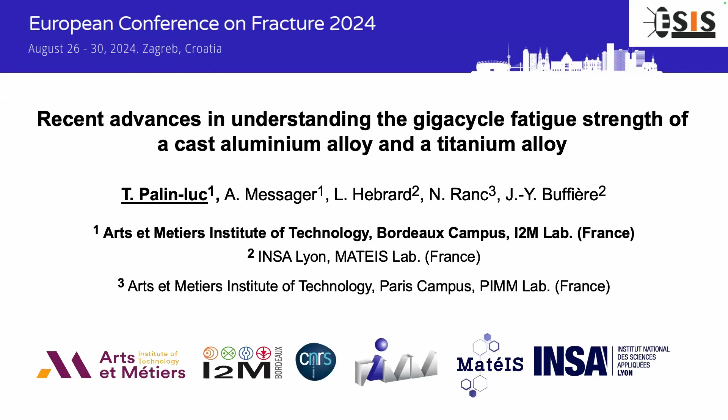As all of you probably know, according to recent research during the last 25 years, there is probably no infinite fatigue life. We have to consider, for ensuring very good reliability of structural integrity, that cracks may appear even after very, very long life.

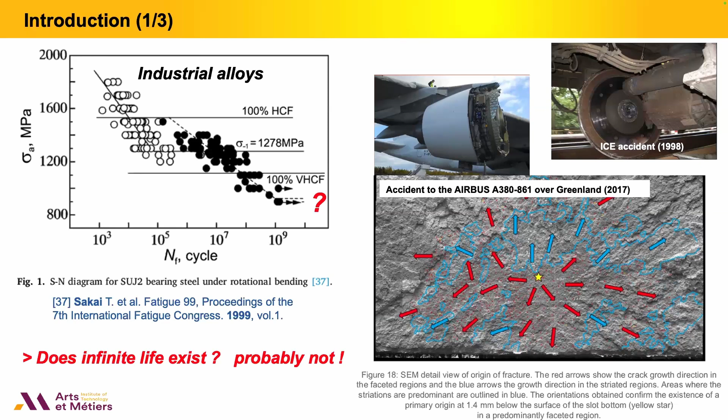Recent incidents or accidents: here are two examples. An example with a high-speed train around 30 years ago, and a more recent accident with an Airbus reactor in 2017. Responsible for these accidents or incidents were internal defects.

In very high cycle fatigue, the role of defects is very well known as a crack initiator or trigger for crack initiation. In the high cycle fatigue regime, around 1 million or 10 million loading cycles, there is a very famous Kitagawa-Takahashi diagram.

Oh, I have a problem with...

On the left you can see the Kitagawa-Takahashi diagram, which gives the effect on fatigue strength, at for instance 10 to the 7 cycles, of the square root area of the defects. Up to a critical size there is no significant effect on fatigue resistance, but when the defect is too large, it decreases drastically the fatigue resistance.

But the problem is that such a diagram doesn't explain why, when you decrease the stress level, the fatigue crack initiation shifts from the surface to the internal region. We know that critical defects are in the material and give a typical pattern like fish eyes, but we do not explain why there is this shift from the surface to the core.

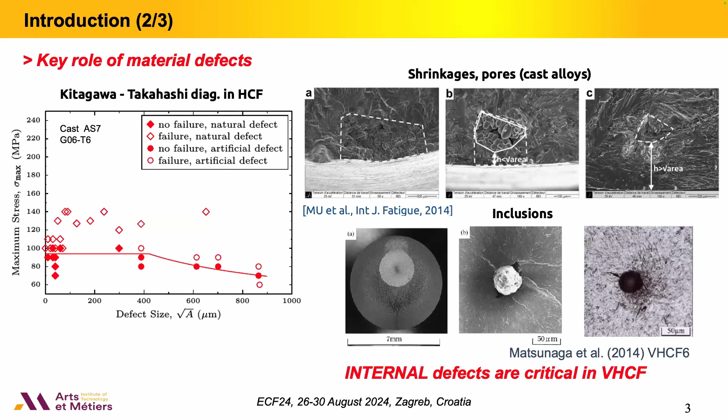The objectives of the different works we have led with the PhD students was to answer the following questions. We would like to do direct observation of internal cracks, initiation and early crack growth, in order to try to understand the mechanisms, and to compare the kinetics of the crack at the surface and in the core of the specimen.

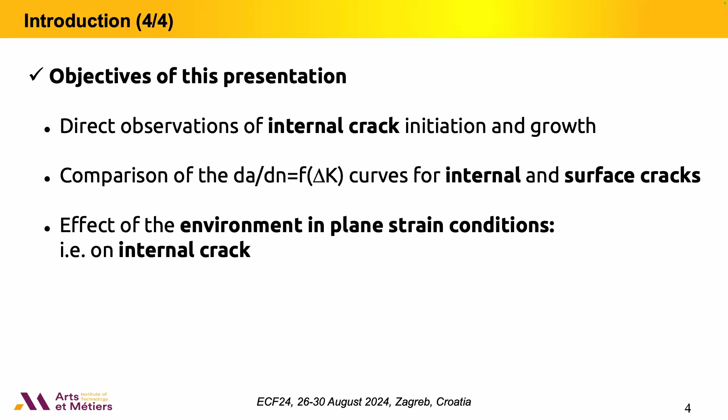The aim is, in fact, to study the effect of the environment on crack growth under plane strain conditions, because in the literature many authors explain that the criticality of internal defects and surface defects are different, because the stress and strain states are different: at the surface you are in plane stress, and in the material, plane strain.

In order to reach this goal, I have organized my presentation into three main parts. First I will present the materials and the specimens, because they are very correlated together, and I will explain why. The second part is devoted to the experimental method or methodology and the techniques we have used. The core of the presentation is devoted to the results and analysis, before some conclusions and prospects or challenges for the future.

The first material is a cast aluminum alloy with silicon and magnesium, which is very well known. This is A357 in the T6 state, a classic aluminum silicon magnesium alloy.

This alloy has been produced by the French Research Casting Center in Paris. I emphasize that this is exactly the same alloy produced also in other research published by Serrano-Munoz and co-workers approximately 8 years ago. So we were able to take the results from the literature and compare their results with surface cracks to our results on internal cracks.

Our material has a secondary dendritic arm spacing around 28 micrometers, an important parameter for the fatigue behavior. We have the typical microstructure with an alpha aluminum matrix and silicon particles.

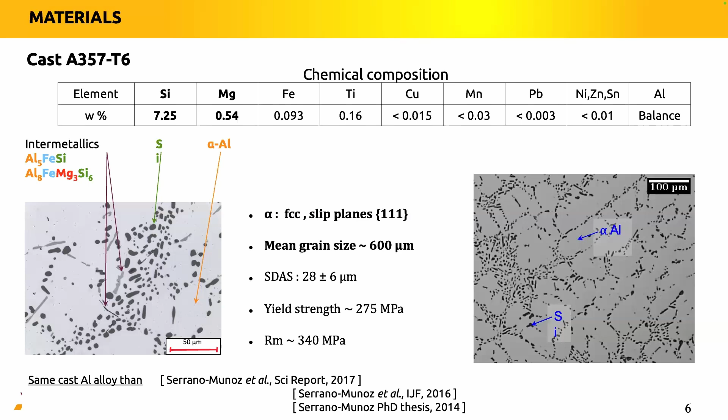These materials were cast in round bars in order to machine the specimens inside the bars. Two batches were prepared, in fact three, but today I'm presenting only two of them. The two batches of interest today are: the reference batch for the reference fatigue strength of the material with the smallest possible defects we can produce by casting, and the second batch of specimens with a single big defect in the center of the bar.

So we have created artificial internal defects with a diameter of a little less than 1 millimeter, around 700 or 800 micrometers. These big defects you can see here, on the left, show a tomography slice of a specimen with a diameter of 3 millimeters, with the internal artificial defects produced by a small piece of salt. You can see it here reconstructed after tomography in 3D.

The defect is in red, and around it are pink, very small natural defects. The idea of this central defect is to promote crack initiation, in order to be sure that where we observe the phenomena exists and not elsewhere.

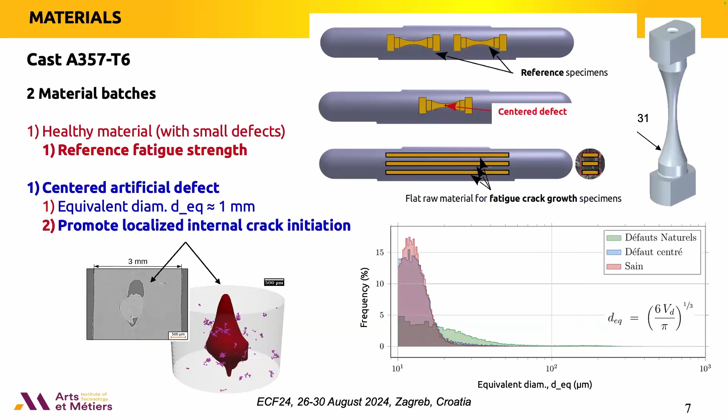We have also produced some flat specimens for classic crack growth measurement with classic fatigue testing. I will not present those results, I present only the results about the other specimens.

The other materials are specimens in a titanium alloy, the Ti64, which is very well known in literature. It has been obtained by hot rolling, and after we have applied an annealing treatment. This is a classic alpha-beta microstructure. Most of the microstructure is the alpha phase, around 94%, with a grain size much smaller compared to the other alloy, around 10 micrometers.

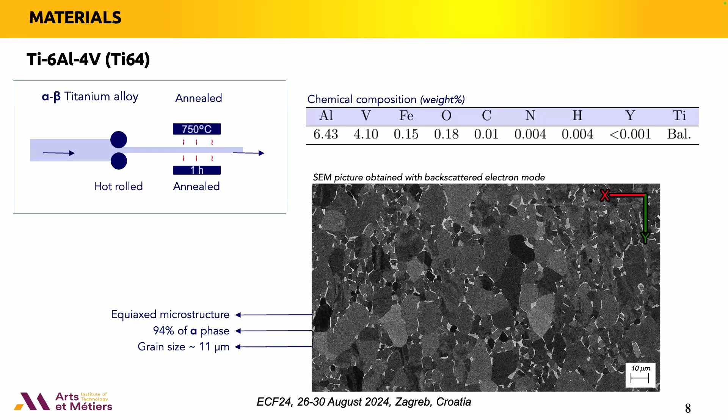In such an alloy, since it is produced by hot rolling, we are not able to introduce artificial defects easily by manufacturing. So we decided to introduce an artificial defect with a special procedure. It has been prepared and defined by Arnaud Junet, and it is published in this paper in Scripta Materialia.

The process is the following: you cut small pieces in a flat titanium sheet, and we produce at the surface of one sheet a sharp notch, a very small sharp notch, by a femtosecond laser. Then we polish very precisely the surface of 2 plates, and bond the 2 plates by spark plasma sintering. This process is made under vacuum, so it is interesting because in this case you obtain finally a piece of titanium with a very sharp notch under vacuum in the center of your specimen.

After assembling these 2 plates, the specimen is machined by turning. We have obtained precisely the position of the sharp notch by X-ray tomography before machining, so we are able to know that the defect is in the center of the specimen. Here are 3D images of the defects. Its typical dimensions are a length of around 200 micrometers, a width of 120, and an opening of 20 micrometers maximum, typically 15, sometimes 20.

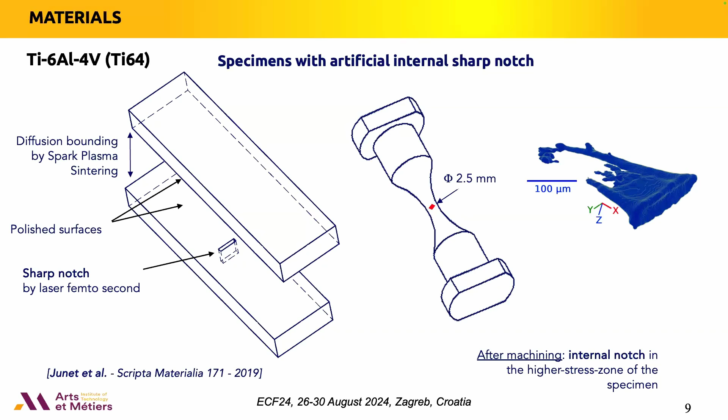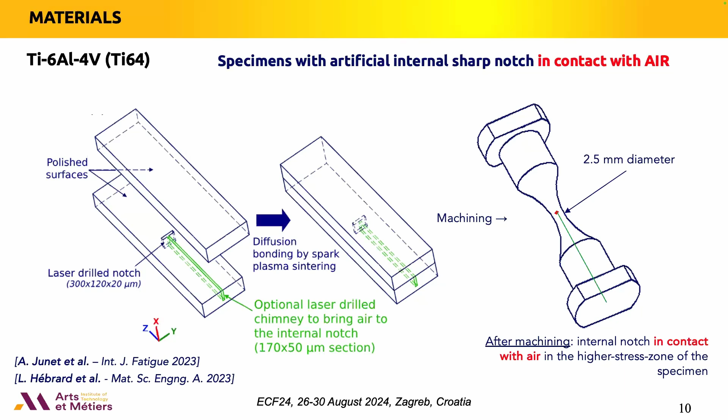The other set of specimens produced uses the same procedure, but the idea is to allow the air of the lab to come into the crack inside the specimen. So by laser machining, we produce a small canal or chimney that allows air molecules to come into the crack, into the center of the specimen. We use the same procedure, and finally we obtain the specimen with the central defect and the chimney to allow air to come into the specimen.

Now I'm presenting the experimental method and techniques. In order to observe the crack initiation, we will use in situ fatigue experiments with synchrotron. I'm also presenting the specificity of the specimen geometry.

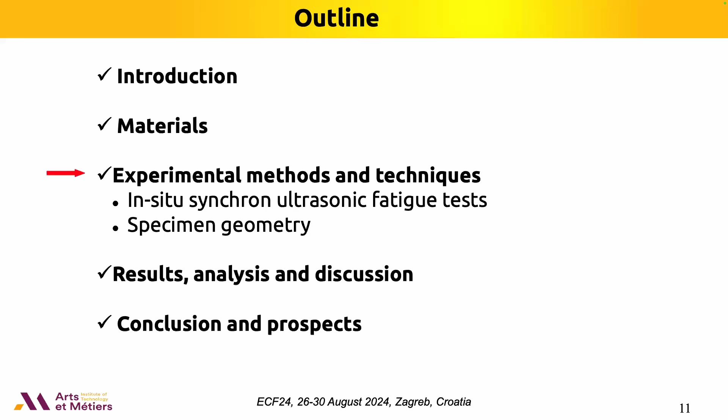Our needs in order to be able to observe crack initiation and early crack growth are the following. We want to be focused on internal crack initiation, so we have introduced artificial defects, and we test in the very high cycle fatigue regime, because we know that in this case we have the maximum chance to observe an internal crack.

We need to do the test in realistic testing time, because the synchrotron time shift allows you typically a few days, sometimes 2 to 5 days maximum. So we need a quick test, and we do the test at ultrasonic frequency.

To detect the crack initiation during ultrasonic fatigue testing, it is necessary to use an ultrasonic system that is able to detect the crack initiation automatically. I will show you on the next slide the principle of the testing machine. The testing machine needs to be mounted on a synchrotron beamline, so we need a light, movable ultrasonic testing system.

He has already observed internal cracks in a similar titanium alloy, but the cracks are very difficult to observe because the contrast between the crack and the microstructure is very small. That's why opening the internal crack is very important.

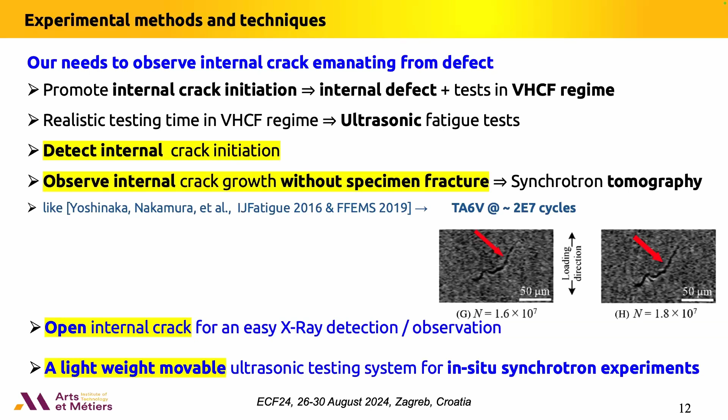So we have designed the following apparatus that is described with a lot of details in these 2 papers. Because of the limit of time, I present very briefly the system. It is based on a classic ultrasonic testing system.

A classic ultrasonic system is based on a piezoelectric actuator, the cylinder that is here. This piezoelectric produces a vibration at 20 kilohertz that is applied at the top of a horn. This horn amplifies mechanically the vibration, and this vibration is applied at the top of the specimen, which is here.

This system is mounted on the beamline of the synchrotron. And when we do not load the specimen at 20 kilohertz, we need to be able to do the X-ray scan in order to reconstruct the 3D geometry of the material and of the defects.

To do that, we have decided to mount the system on a tube, and the tube is loaded vertically by an electromechanical system, and the specimen, with a special geometry here with a shoulder, is put in contact with a load cell in order to apply the quasi-static loading when there is an X-ray.

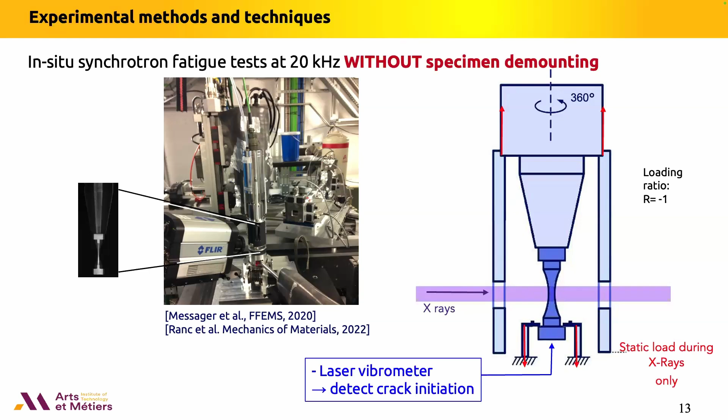When there is no X-ray, in order to automatically detect the crack, we use a laser vibrometer that is monitoring the vibration of the specimen at the free end. By monitoring with a fast Fourier transform in real time the appearance of second and third harmonics, meaning the nonlinearity of the system due to crack initiation, we are able to detect a crack of typically 100 micrometers.

So the methodology for testing is the following. At the beginning, when the specimen is virgin without any cyclic loading, we do tomography. It gives a reference state of the material and of the defects of the microstructure. This scan is done at a load level corresponding to 80% of the stress level that you want to be applied during the testing procedure.

And then step by step, we apply cyclic loading. So a first block is applied up to the detection of internal crack initiation by the fast Fourier transform analysis of the velocity of the free end of the specimen. And then a tomography scan is done to obtain the image of the cracks.

And then we run again a cyclic loading during a number of cycles that has been programmed. Then we observe again the increase of the crack and so on, up to either the breaking of the specimen or up to the end that you decide because, for instance, the stress intensity factor becomes too high.

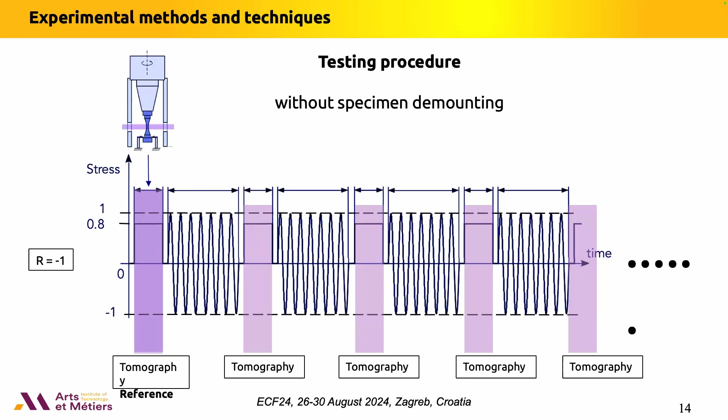So now I'm presenting the results and the analysis and the discussion of our results. First, I'm presenting the results about crack initiation, and then we will see the crack growth mechanisms and the Paris diagram.

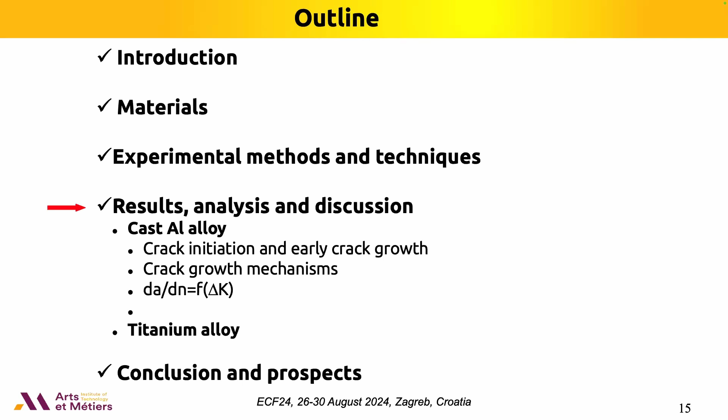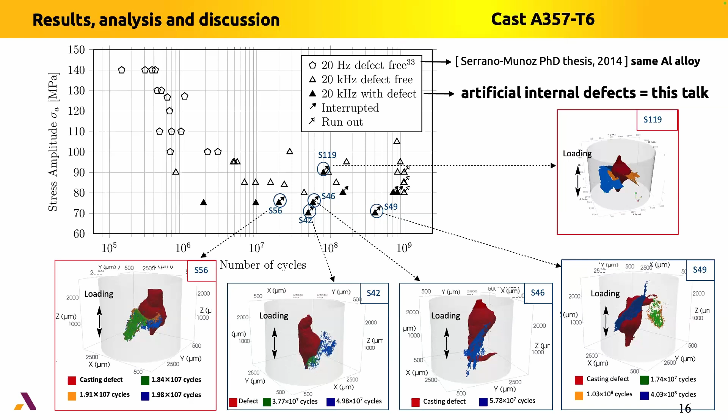So first, specimen 119. This one is very interesting because it has a very special response that we observe only 2 times, 2 specimens. On this specimen, we have loaded it at 60 megapascal, and the first crack was detected after approximately 4 times 10 to the 7 cycles.

And we apply the testing procedure step by step, meaning we apply several numbers of cycles and try to observe the crack propagation. But in fact, after 10 to the 9, we observe no crack propagation. The crack was arrested. So since the time is limited at the synchrotron, we decided to increase a little bit and we load again the specimen at 70 megapascal and continue the procedure.

And we didn't observe any crack propagation again. So finally, we decided to increase, step by step, the stress level. And finally, we obtained only the appearance and initiation of a new crack elsewhere in the microstructure, in fact behind the defects of another crack.

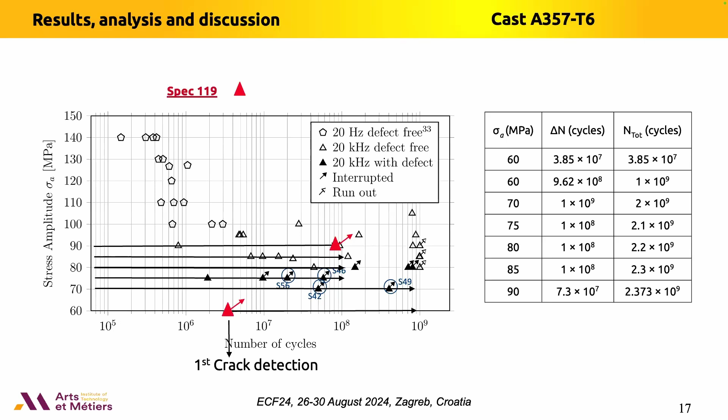And finally, we observe that at 10 to the 8 cycles. So, it means the specimen history is all these load cycles. So now, if we try to understand why we observe that.

In fact, if I summarize graphically the loaded history of this specimen, it is illustrated here. You have the stress amplitude applied and the number of cycles. For information, here is the duration of the test at 20 kilohertz, showing that the test is realistic in 1 day.

So the first crack initiated is here, in orange. Here, in fact, there were 2 cracks, one here and one here, but these 2 cracks were arrested. And finally, a new crack has initiated after all this loaded history, here on the back and here around. These 2 cracks here are not connected. So we have the global loaded history of this specimen.

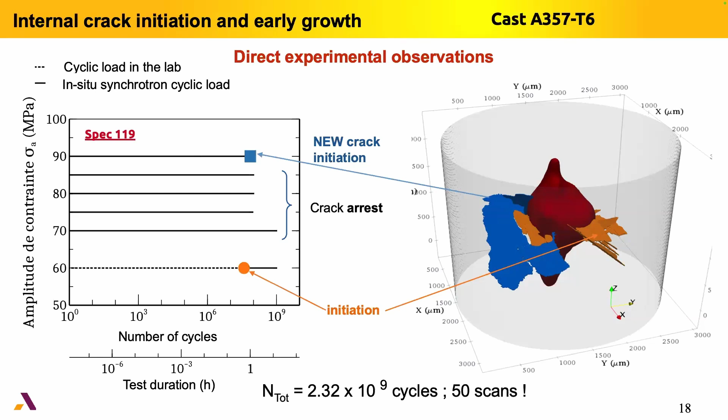And this history shows that in gigacycle fatigue, the crack initiation is not always dominating. So it is an important result. Sometimes the cracks are arrested.

So you can see here, for instance, after we have broken the specimen in a voluntary manner under quasi-static loading in order to observe the internal defects. And you can see here the defects. The original crack is here, and the second crack in blue is here, and the second crack has initiated here on the left and then propagated.

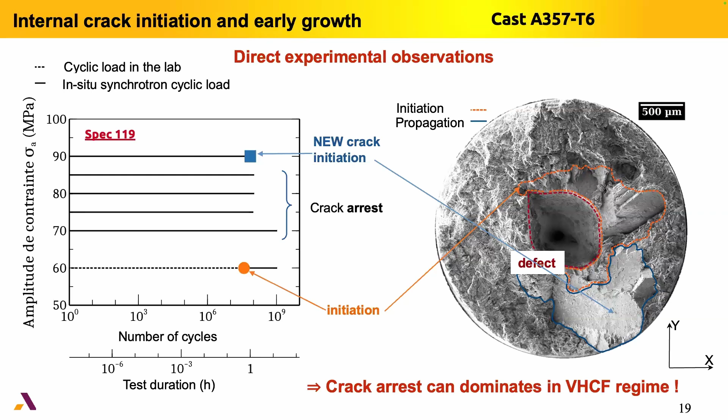By diffraction contrast tomography with the synchrotron X-ray, it's also possible to know the microstructure of the specimen. So the microstructure, in terms of grain orientation and grain dimension, has been obtained here before the cyclic loading. So we have labeled and given a number to each grain.

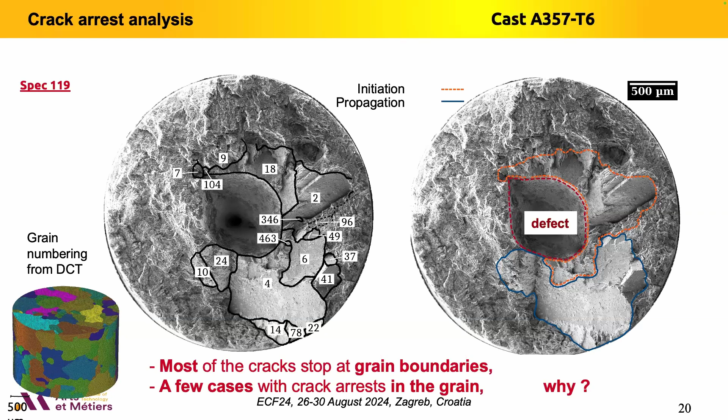In this case, we are able to know the interaction between the cracks and the interaction between the slip systems. So in the next slide, I will try to explain why sometimes the crack is stopped on the grain boundary, and why sometimes the crack is stopped within the grain.

So if you look at the microstructure and the cracks in this specimen, we obtain at the beginning the following 3D configuration. There are 3 cracks, A, B, C. And you can see here that cracks A, B, C are all in one grain, number 18.

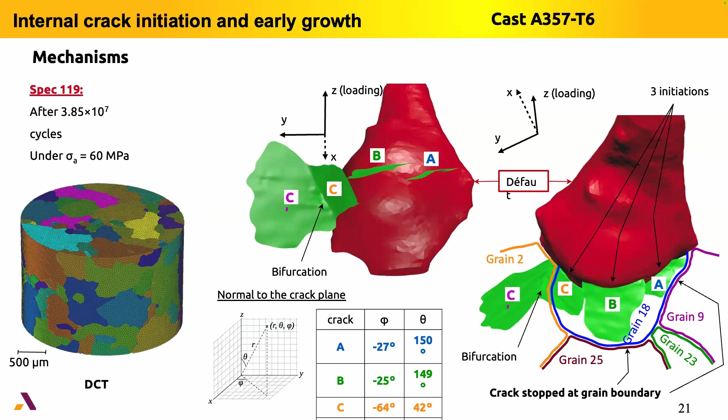So the question is why only one crack, number C, was propagating in the neighboring grain, here, number 2, but not the others into the neighboring grain.

So to do that, classically, we have computed the Schmid factor in the different grains and the different slip systems. And it's easy to see that the crack in grain 18 propagated according to the highest Schmid factor, which is system 4 here, S4, illustrated here. That's why crack C propagated into grain 2. You obtain crack C prime because the Schmid factor is very close to the possible maximum, 0.5.

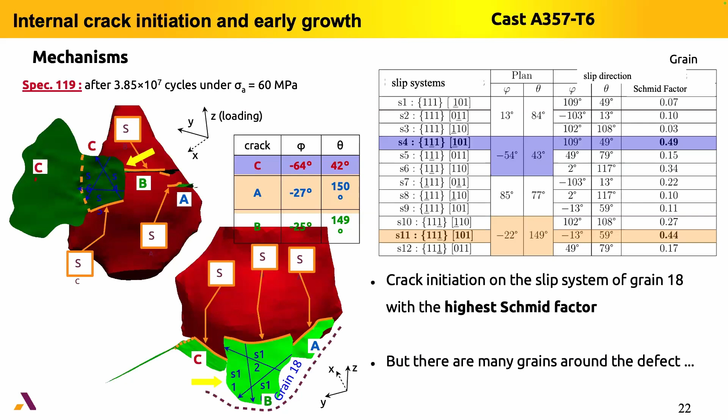But in fact, around the defects, there are many grains. There is not a unique grain. So we have computed in all the grains and all the slip systems around the defects.

In our case, there were 360 slip systems. Computing the Schmid factor, we observe that around the defects, the distribution of the Schmid factor is the following: there are 13 slip systems with the Schmid factor very close to the possible maximum, very close to 0.5. And there are 33 slip systems with the Schmid factor higher than 0.44.

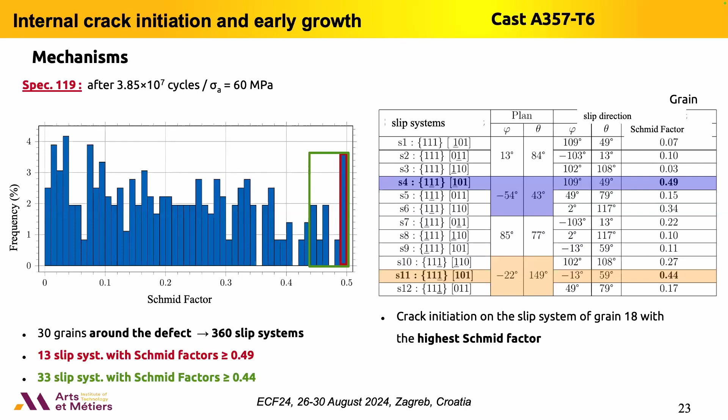But nevertheless, we will see why the cracks have the observed configuration. In fact, in the literature, we know that when there is a crack interacting with the microstructure, the crack is able to tilt and twist to change its propagating direction.

So we have computed in the neighboring grain the 2 different possible configurations: either the maximum Schmid factor corresponding to the maximum possibility of slip, or the angle of twist and tilt corresponding to the minimum deviation.

And we have observed, in fact, that crack C, corresponding to the propagation in grain 2, propagates through the grain boundary because it corresponds to the maximum Schmid factor, but not the minimum deviation. Each time you look at the minimum deviation of the tilt and twist angle, you do not obtain a high Schmid factor. So it is clear that crack propagation is governed by the slip activity in the neighboring grain, and the crack doesn't try to minimize the tilt and twist deviation.

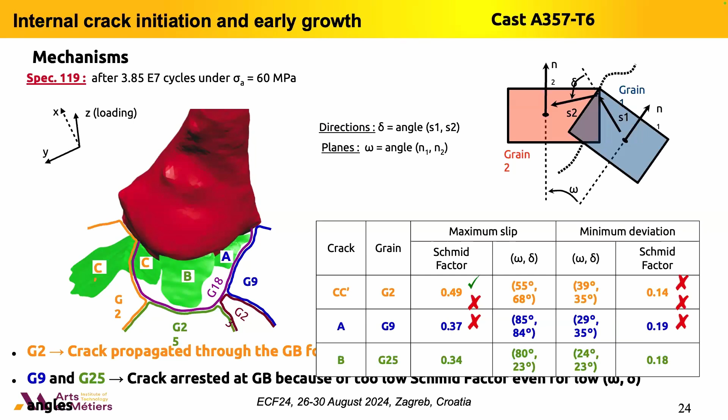This is also an interesting point. A detailed observation of the fracture of the specimen after cyclic loading by fracture by quasi-static loading shows us that the crack propagation was parallel to the activated slip systems, but the cracks were stopped in the grain where the crack propagation becomes perpendicular to the active slip system in front of the crack. It is interesting to understand why the cracks can stop.

It shows also that most of the propagation is done in mode 2. That is classic in literature for surface cracks also, because we know that the initiation and early crack propagation is done in shear, so in mode 2.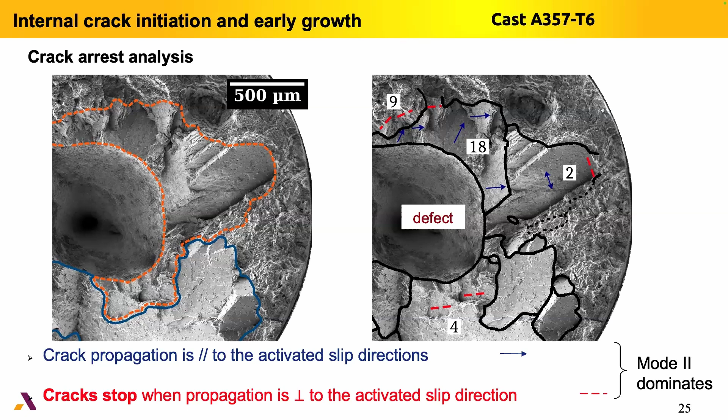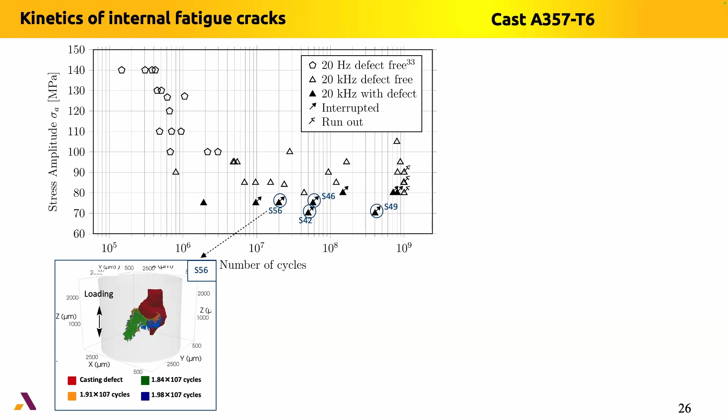Now let me focus on the other specimen, number 56, which was loaded at 75 megapascal. For this specimen, we have the complete load history, which is very useful in order to reconstruct the crack growth kinetics. Again we have observed 3 cracks, but this is another specimen. I gave the same name, crack A, B, and C, but the crack configuration is completely different.

Illustrated in false color is the initial crack detected by our testing system. The first crack is in green here, detected after 1.85 times 10 to the 7 cycles. Step by step, you have the increment of number of cycles decided to observe step by step the crack propagation. We observed crack initiation on crack A, and finally this crack was stopped, and we observed then the propagation of two other cracks, B and C.

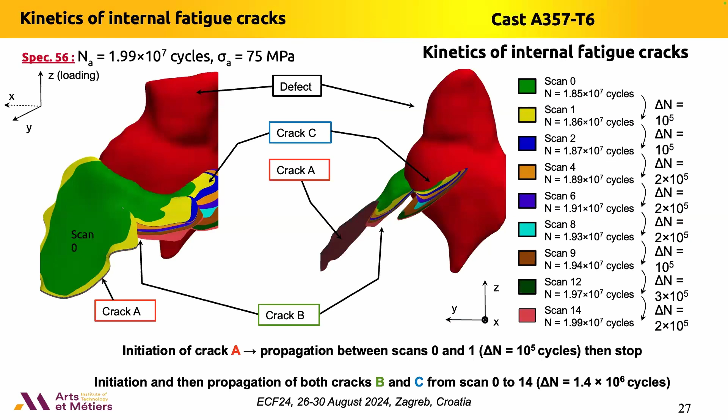In order to reconstruct the kinetics of the cracks, we need to compute the stress intensity factor and to know the advance of the crack. The advance of the crack has been given by the 3D analysis by tomography. After meshing the defects obtained by tomography, we defined the crack increment by the direction perpendicular to the crack front, in 3 directions since it's a 3-dimensional problem. We computed the stress intensity factor range by finite element analysis with the Z-crack software.

We did an elastic computation because we are in a very high cycle fatigue regime. We assumed that crack closure can be taken into account in a very simple manner because, unfortunately, under ultrasonic testing we are not able to know what is the opening load. A simple way is to consider that the crack is open as soon as we consider only the tensile part of the fully reversed loading, meaning we neglected the compressive part of the cyclic loading.

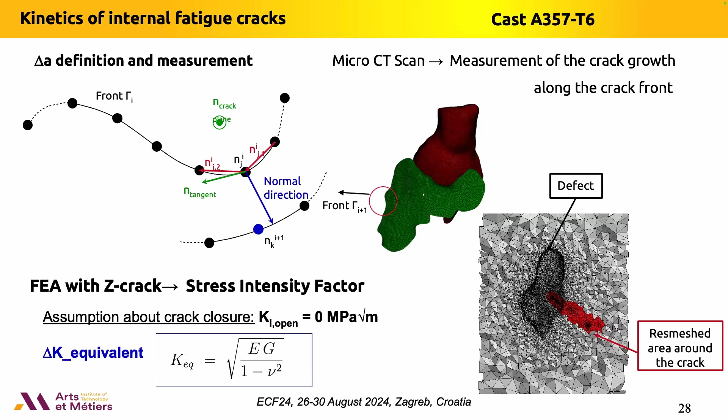We also consider that the crack interacts with the microstructure, meaning it propagates in a mixed mode. We computed the range of the equivalent stress intensity factor according to the strain energy release rate. We obtained the following results plotted in the Paris diagram. There are many things plotted in this figure, so I will take a few minutes to explain.

Our results are in orange, the internal cracks at 20 kilohertz, shown as orange stars. First, all these points correspond to the crack advance all around the crack front after different instants of the loading. So when the crack is small, the cracks oscillate between propagating at a low speed and being arrested, like a classical small crack at the surface that is interacting with the microstructure.

You can see that when the crack is long enough, loaded corresponding to a range of the stress intensity factor approximately higher than 5 megapascal square root meter, the propagation is in very good agreement with the surface crack data obtained in vacuum. These data are coming from literature obtained by Rotella in 2018.

If we compare this crack propagation also with the surface crack in air, we can see that the propagation, when the crack is long enough, is in very good agreement with the surface crack in air at 20 kilohertz. This means that at 20 kilohertz, probably the effect of the environment has not enough time to be applied, and that's why the surface crack propagates in the same way.

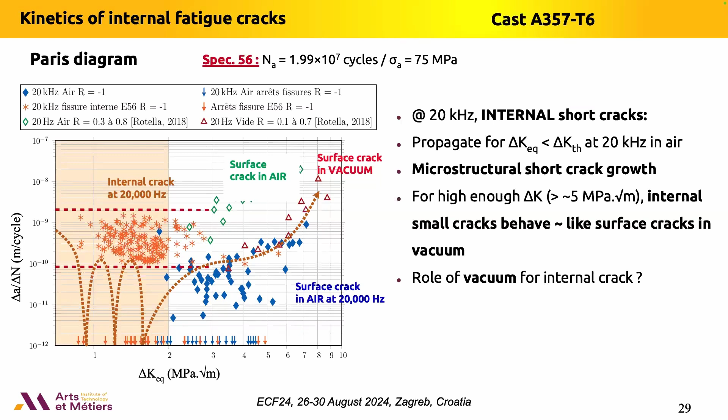If you compare to a surface crack in air at a low frequency, typically 20 Hertz, data also from literature, we see that there is a very big difference in crack growth rate. So we can keep in mind that the microstructure plays a very important role on the crack propagation. The small cracks behave inside the material like a surface crack in vacuum. Probably there is a very big effect of the environment, and we will see that in the second part of the presentation.

So to conclude this first part, we can see that in situ synchrotron ultrasonic fatigue tests are very useful to obtain a direct observation of the internal cracks. It shows that the internal crack initiation does not always dominate the total life of the specimen in very high cycle fatigue regime, and the crack may be arrested at the grain boundary.

That's why there is a very important role of the slip system of the neighboring grain around the crack. It is also important to keep in mind that microstructure plays a very important role because of the mixed mode that is governing the crack propagation, and that the internal small cracks at 20 kilohertz has a propagation like a surface crack in vacuum.

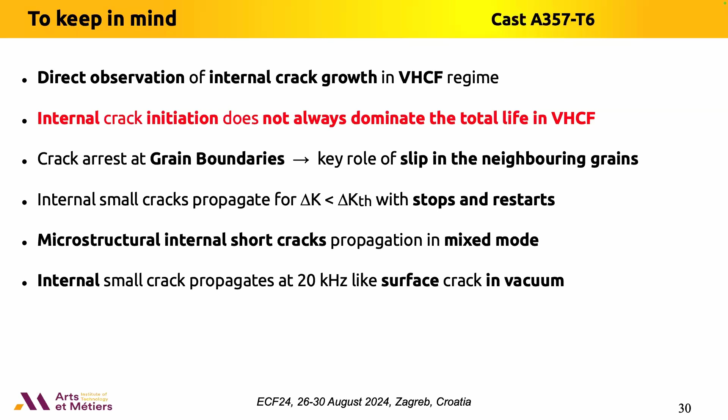So now I'm talking about the titanium alloy experiment.

If I show you in a Wöhler diagram the results obtained with the three sets of specimens, for the titanium alloy we have the virgin specimen without any defects, a specimen with an internal defect obtained by femtolaser machining, and another set of specimens always with the defect at the middle of the specimen, but also a chimney in order to bring air molecules inside the specimen. We obtain the following results.

The results in black are from literature on the same titanium alloy. First, we can see that our results without the defects, the purple symbol here, are in agreement with the literature. But the most interesting thing is to look at these results.

If you compare the specimens loaded more or less at the same loading level, around 310 megapascal, we can see there is a big difference in the fatigue life between the specimen with the internal defect and air inside the crack and the specimen with an internal crack without air. We see that the fatigue life is very, very reduced when you put air inside the specimen.

So we try to understand that.

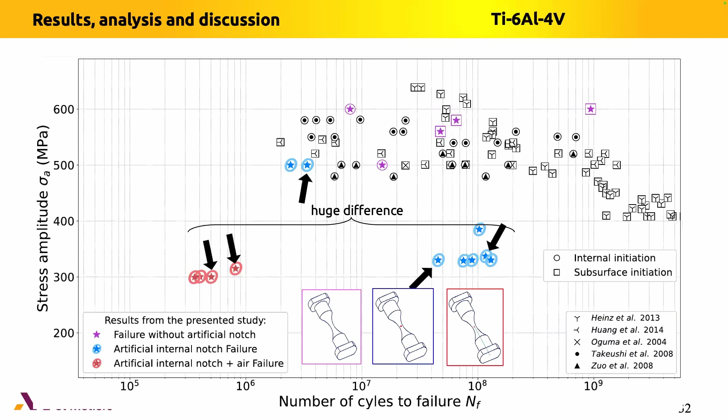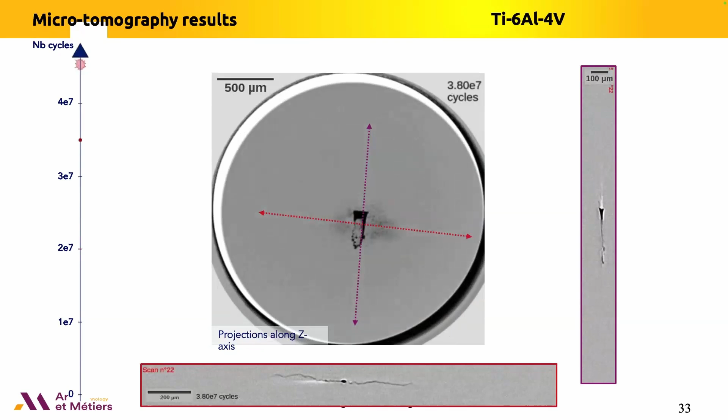First, I show you here a quick video of the crack initiation and crack propagation obtained by tomography. This is a projection along the vertical axis of the specimen. Imagine the specimen is loaded perpendicular to the screen, and you can see the projection of the crack and its evolution. On the right and bottom, you can see the projection by the two cutting planes, showing the artificial defects and then the propagation of the crack. So we can reconstruct step by step the propagation of the crack to build its history.

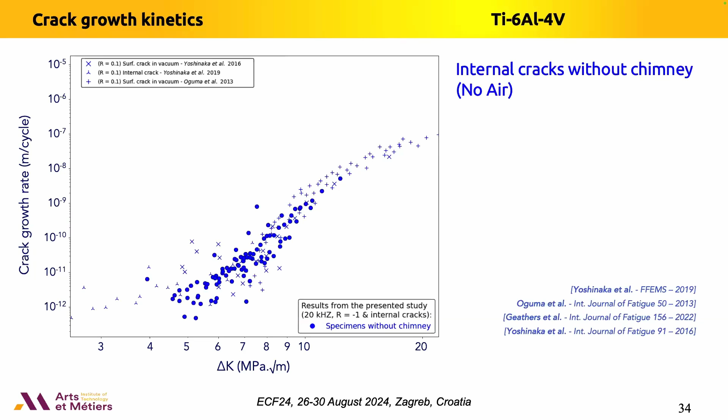Then if we look at the same experiments, but with air inside—this is on another specimen—you can see here the defects, and the vertical chimney here, which allows air to come inside.

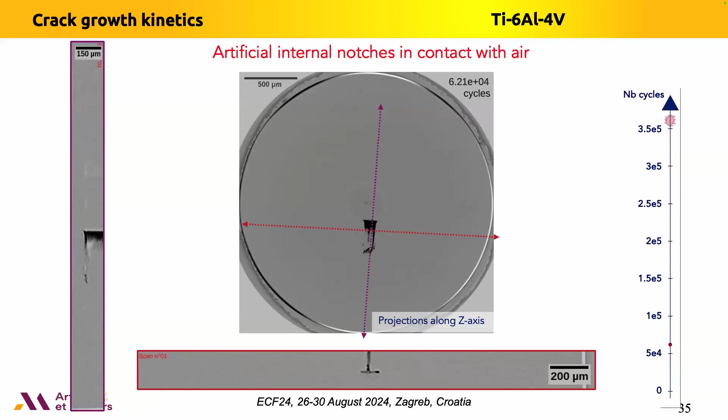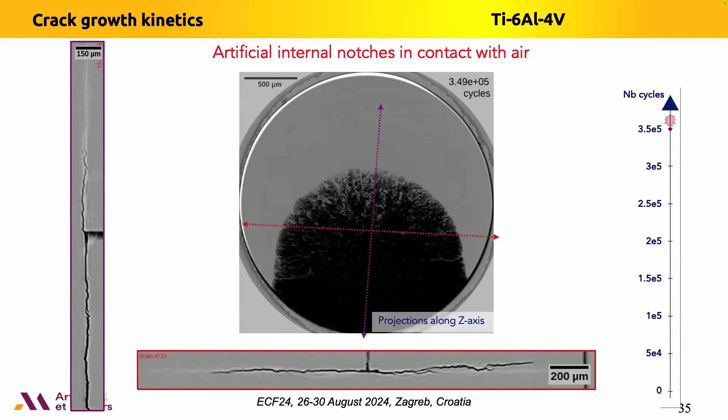Here, only qualitatively, you can see that the crack propagation is much faster. Of course it depends on how I build the video, but you can see that the number of cycles going from 0 here to 3.5 times 10 to the 5 is very quick.

So you can find that on the Paris diagram. This is the red square. Our data are the red square, the specimen with the chimney, compared to the blue round point, the same specimen without air. You can see that when delta K is small, there is a very big difference in the crack growth rate.

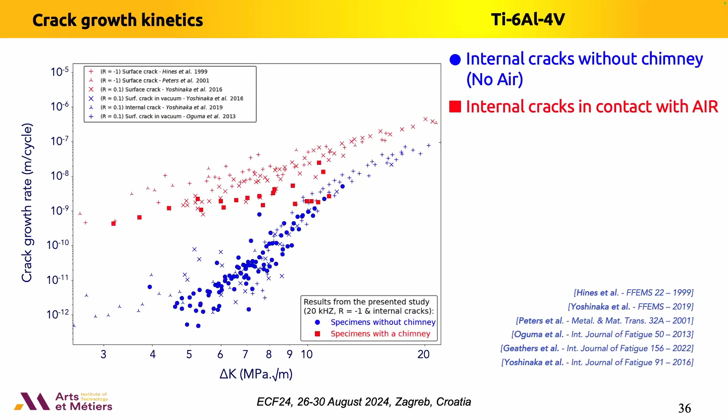Our data are compared with the red cross coming from literature data. Again, we can see that our data are in agreement with the literature for specimens with a crack, but with a surface crack. All the crosses correspond to literature data with a surface crack in air. So this diagram shows that an internal crack with air propagates at the same speed for an equivalent delta K as a surface crack in air.

It is interesting to compare our results to a surface crack in vacuum at the same loading frequency as our experiments, that is 20 kilohertz. According to our knowledge, there is a unique study published by Geathers and co-workers from Michigan University, and I reported their data here.

This experiment corresponds again to a titanium alloy, similar to ours, but with a surface crack in vacuum. You can see that in this case, the surface crack, this point surrounded in yellow here, propagates similarly to our internal cracks.

In these studies, they also reported a surface crack at 20 kilohertz, but not in vacuum—this is the cross highlighted in yellow. When the surface crack is not in vacuum, sorry, you see that the points are in good agreement with the surface crack of literature and with our data.

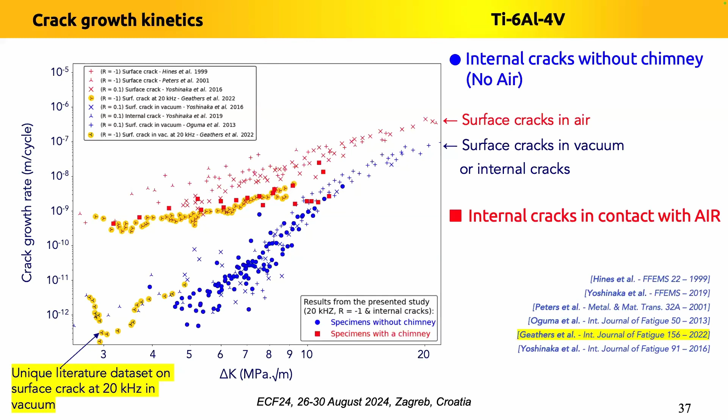So now if we have a look at the surface fracture in order to see part of the mechanism, as we know in literature for gigacycle fatigue fracture features, we have observed a black area or dark area, a bright area, and the fisheye.

First, if we look at the specimen without a chimney, we can classically observe in the black area a rough surface and small facets. This is in agreement with literature observation. You can see the facets here observed by different workers.

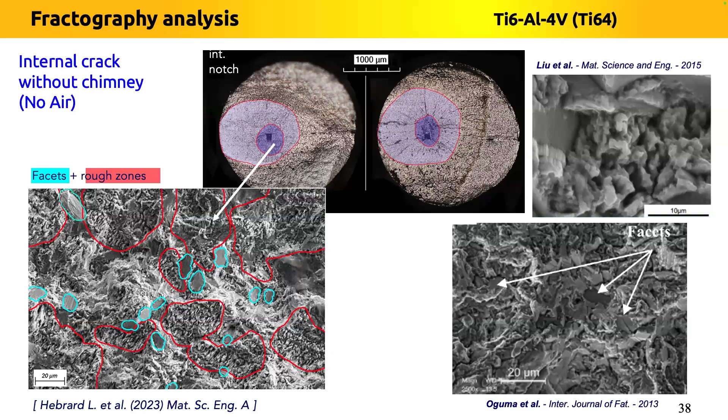And if we want to know what's happened in the facet, why there is this facet, we have cut it by FIB and observed it. We observe that there is a unique grain, shown by transmission Kikuchi diffraction, so probably this grain was broken by cleavage or quasi-cleavage.

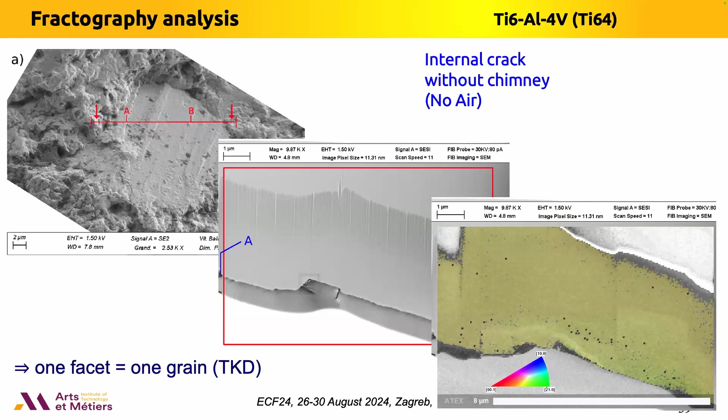If we look just around the facet in the rough area, we have observed by EBSD the microstructure, and we observe nanograins below the granular region. That is also classic, but surprisingly we also observe some nanopores. You can see the nanopores here, the scale is very small. So we have both nanograins and nanopores without air.

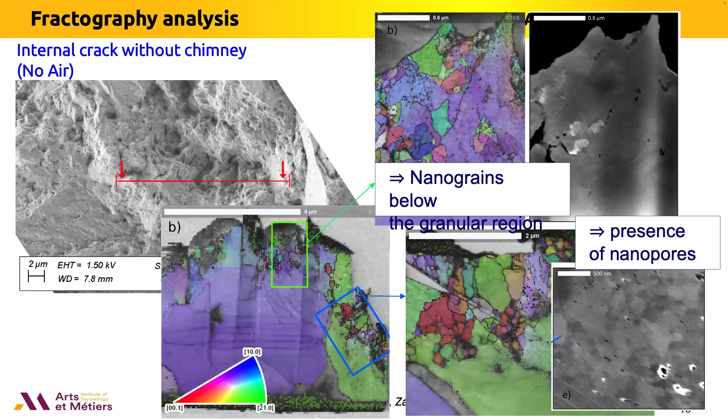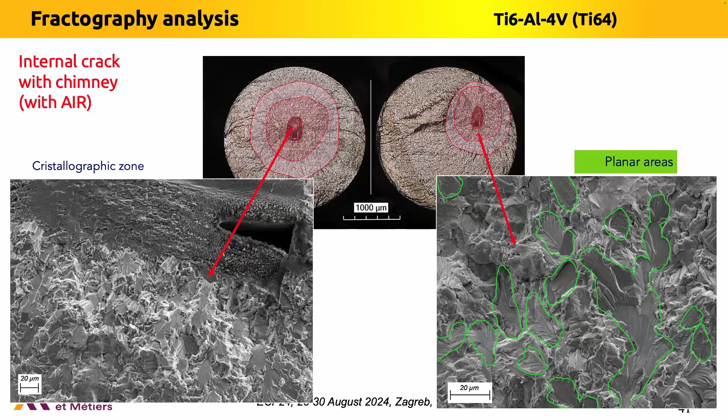Now, if we look at the specimen with air inside the crack, you can see here the pre-crack and the chimney. Around this pre-crack there is a dark area, classically in literature, with a very crystallographic zone. And in the bright facet around, we observe very planar areas, very frequent and very large compared to the initial facets we have seen in the other configuration.

If we zoom on these facets, we can see striations, because of the presence of air, like for a surface crack in air. This is typical in fatigue. We know that a surface crack in vacuum doesn't exhibit striation, but a surface crack in air exhibits striation. And here we observe that for an internal crack as well.

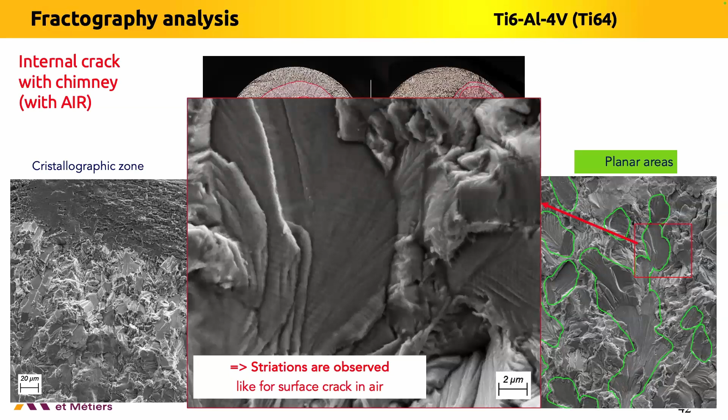The last slide about the mechanism is the following: we have cut the defects and observed by EBSD the corresponding section. We observed the fracture pattern from the chimney to the notch and then to the bright area. We have not observed any difference between the black and bright regions, and we didn't observe nanograins or nanopores. No modification, because we are in air.

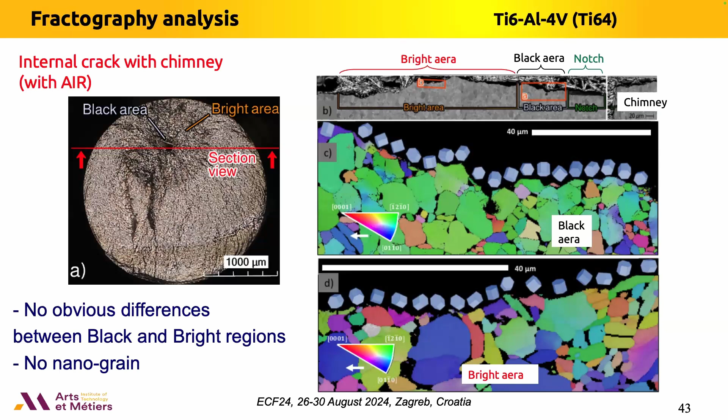So for the titanium alloy, as a conclusion, we can say there is a big difference between an internal crack propagating without air or with the presence of air. The fatigue life is very, very different. So there is a detrimental effect of air on crack propagation. As soon as there is presence of air molecules, the speed is very high compared to vacuum.

When we are in vacuum, we can observe nanograins and nano-holes, but not when there is air. When there is air, we observe only striations. This means there is a crucial role of the environment for internal crack propagation, but there is no effect of the plane stress or plane strain state. This is contrary to many assumptions proposed in literature to explain the difference between internal and surface crack initiation.

Last but not least, our observations are in agreement with the cold welding hypothesis proposed by Oguma and co-workers, because we see that as soon as we introduce air molecules inside the crack, there is no refinement of the microstructure. So probably the layer of oxidation, of oxide, is a barrier for the cold welding process.